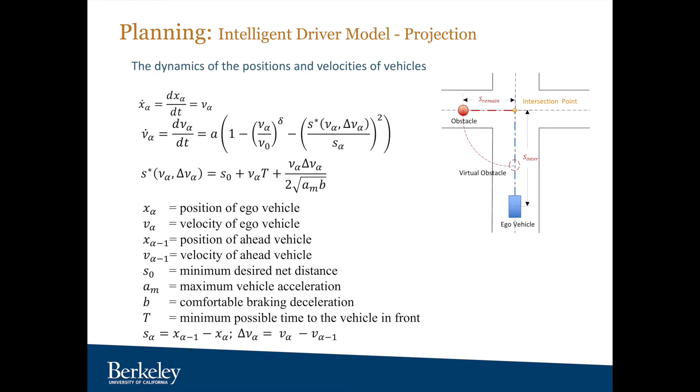Our GPS-based advanced warning method was based on the following. When the obstacle is far from the ego vehicle's eyesight region, we will consider the GPS signal of the obstacle and prepare for the future interaction. However, the GPS signal is pretty noisy. For robustness, the obstacle range will be based on the maximum GPS noise. And after the obstacle gets into the ego vehicle eyesight region, we will use the information of the obstacle directly, since we can see it now.

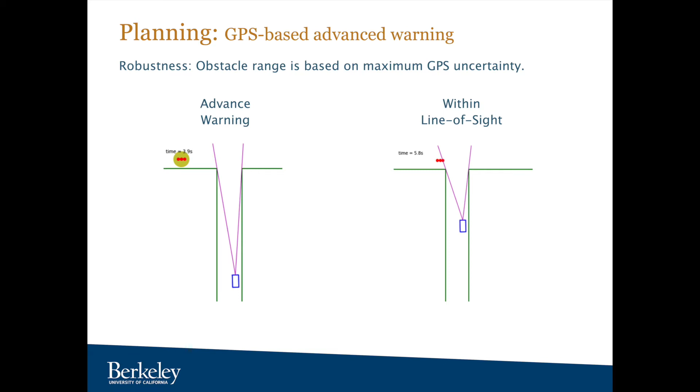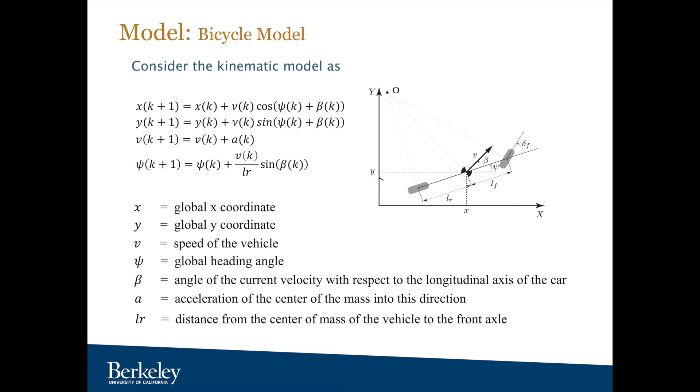We use the bicycle model as our kinematic model to describe the car. We can see from the picture, X and Y are the vehicle's coordinates, V is the speed, psi is the current heading, while beta and A are respectively the angle of V with respect to the car axis and the acceleration. LR is the distance from the center of the mass to the front axle.

In the design of the MPC, X and U are the states and input. We define a quadratic cost function to optimize our path and the velocity with the desired trajectory computed from IDM, and also minimize the rate change of acceleration and steering. For constraints, we use the bicycle dynamic model, set initial states, state bounds, input bounds, and its rate change bounds, so that the vehicle can follow the desired path with a smooth acceleration and steering.

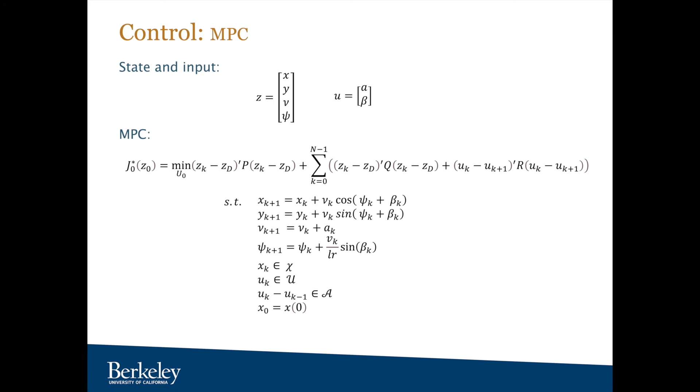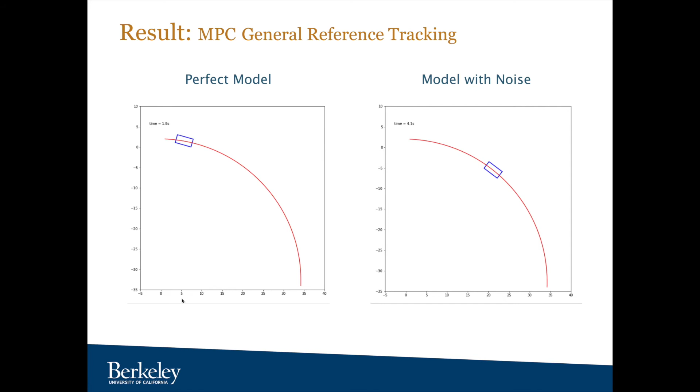Here are the results of our MPC controller tracking a general reference. On the left, we have a perfect model of the MPC controller with no added noise. As we can see from the video, our controller works pretty well. On the right, we have a noisy dynamics model of our system. This is when we add random noise to the current state. Despite the noise, the tracking performance of our controller is still pretty good, with similar plots for both velocity and inputs.

Here we have our IDM planner integrated with our MPC controller. On the left, we have an eyesight-based scenario where the sensors of the ego vehicle are limited to what it can see. Because of the walls blocking the moving obstacle from the ego vehicle, it has very little time to change trajectory and thus collides with the obstacle. This issue does not happen on the right side with the GPS-based scenario, since the IDM planner in this case has access to the noisy state of the obstacle at all times. Thus, it avoids the obstacle successfully and is safe.